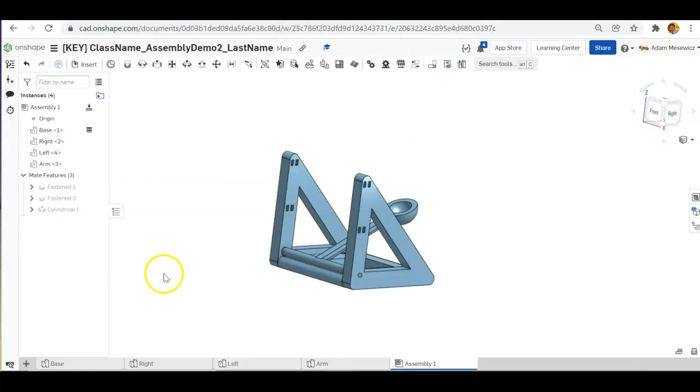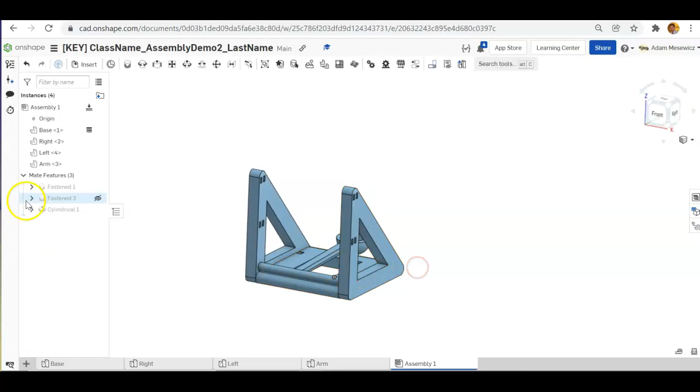In order to make this catapult, you can see that there are several different parts. We have our base, the right panel, the left panel, and the arm. All of these together, when we put them together using the Fasten and the Cylindrical Mate connectors, create this catapult that has realistic motion.

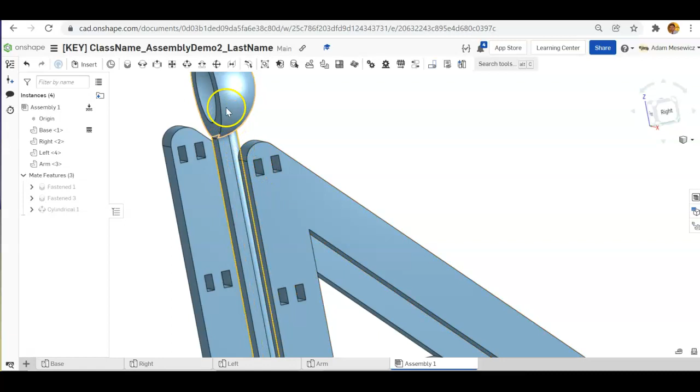Notice how when this is coming down, it's not running into this plastic here, it's not going through it, it's stopping right there. When it goes up, it's going to actually end up hitting - these are going to be where our rubber bands are. We can't model rubber bands in OnShape, but we can imagine that if we had rubber bands here, this is where they would stop. That is what we're creating.

Let's go ahead and get started with this. The first thing you need to do is make a copy of all the parts. Eventually you will be creating all these parts on your own when you do your own catapult, but for today we're just focusing on assemblies.

You'll click on the three bars at the top, and you'll copy that workspace. Make sure that you rename this correctly: your class name, underscore, assembly demo 2, underscore, your last name.

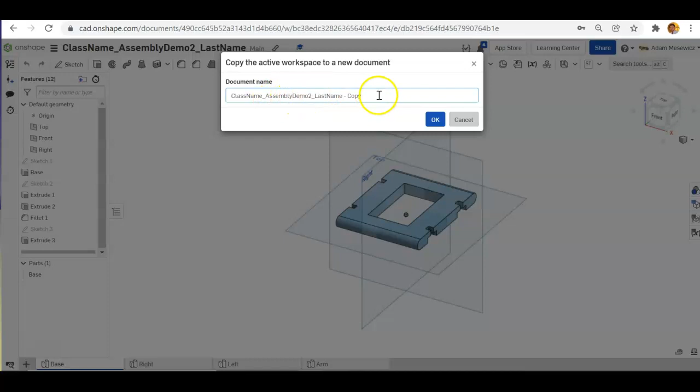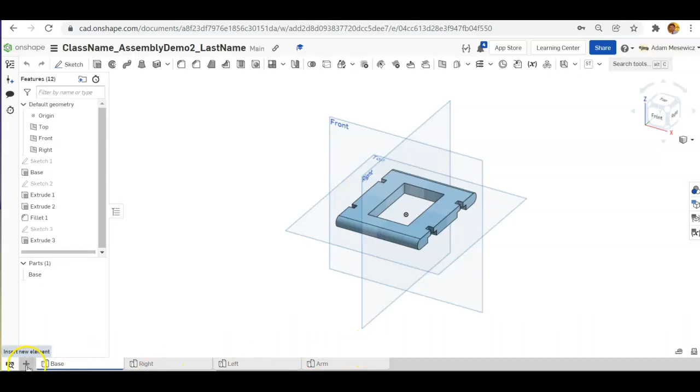Now that we've got our copy of our document with all of our different parts, the first thing we're going to do is create that assembly tab so we can put all these different parts together. To do that, we'll click on Insert Part, Create Assembly, and now we have this assembly tab. I'm just moving it to the end here to keep it a little more organized.

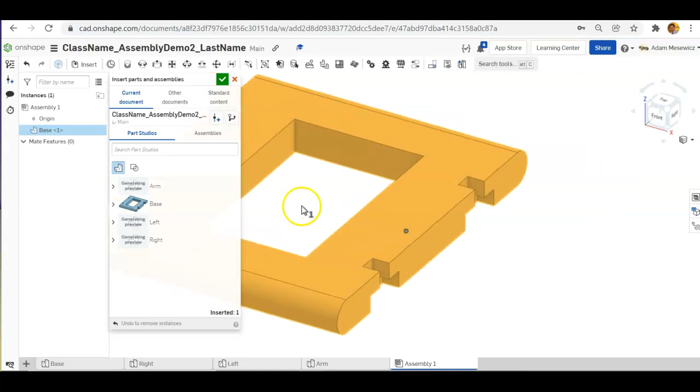The next thing we'll do is start bringing in our parts, and the first part we need to bring in is our base. We'll click on the base, and we can set that wherever we want. Setting it around the origin is probably a good idea - it'll just be easier to zoom to.

We'll confirm this for a second, because the next thing we need to do is fix this base in place.

Today you're going to learn about the Fasten Mate connector, which is different than fixing a part in place. When you fix a part in place, which you can do by right-clicking on the part in the menu and clicking Fix, this icon comes up and fixes the part so it does not move anywhere. You will not be able to move this, and anything you connect to this will be fixed in place as well, unless you allow it to have different degrees of freedom with the Revolute, the Slider, or what we're going to learn today, the Cylindrical Mate connector.

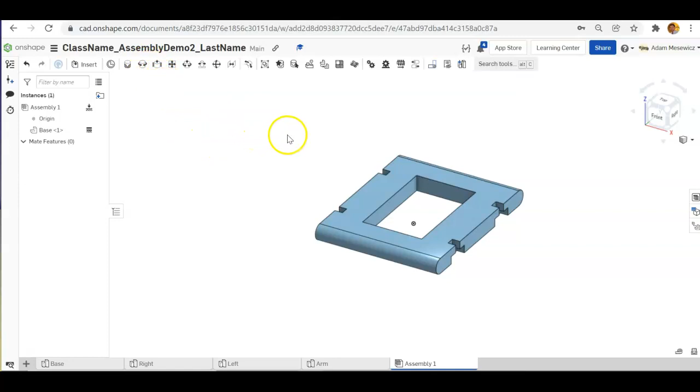So again, fixing is different than fastening. The one part that needs to be fixed, and the only part that needs to be fixed, is that original base. When you're coming up with any of your other projects, whatever part that everything's being built around - that is the part that needs to be fixed.

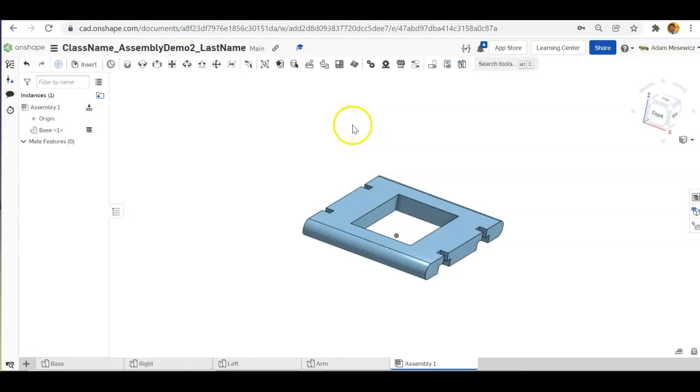Now that we've got the base fixed, we can go ahead and bring in our first part that we're going to attach to that, and that will be the left panel. So we'll bring this in here.

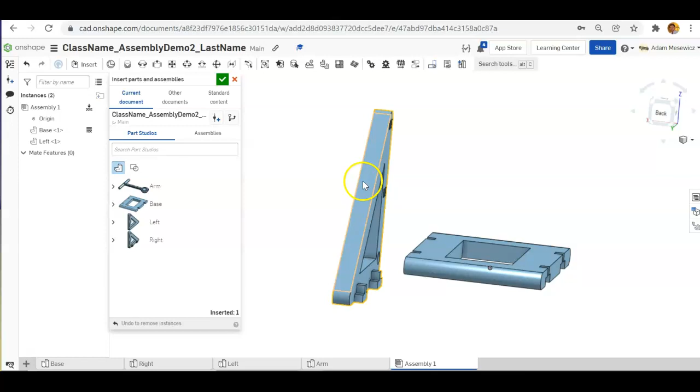You can see that we have these little tabs here that are going to go into the base. Because we want these tabs to go in, we don't want them to move around once we put these things in - it's not like we want these arms sliding in and out. The way that we made these dimensions, they should barely fit - they should be really snug together.

And if we wanted to, we could even put some super glue in there to make sure they don't move around. To show that in OnShape, that's where we're going to use the Fasten Mate connector. It's like super glue. When you click these two different surfaces together, they will be connected like super glue.

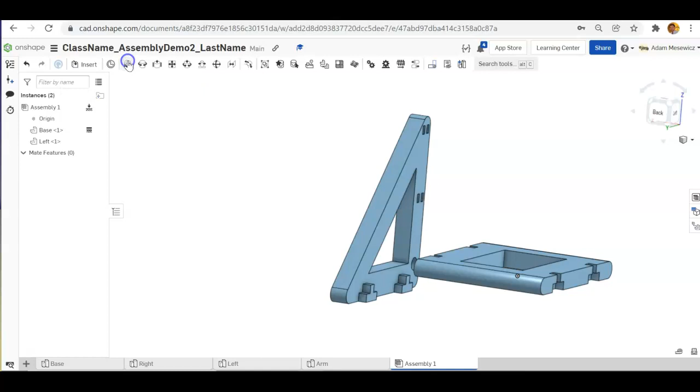So we'll choose the Fasten Mate connector, and then we can choose either of our two tabs, the surface on either of these. The only thing that matters is if we choose the back one, then we need to choose the back of the inside of the base. If we choose the front, we need to choose the front. So I'm just going to choose the back, it'll be a little easier for me.

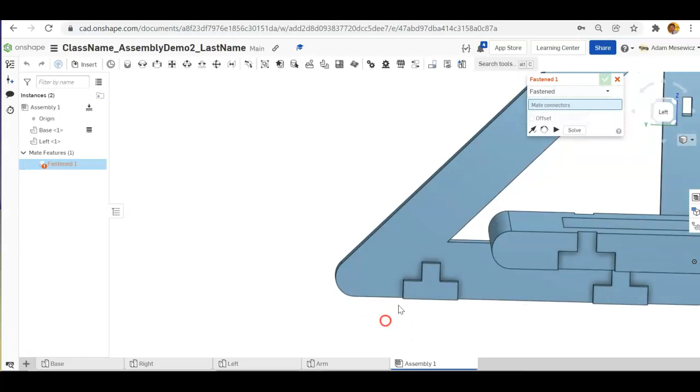First I'll make sure I'm on the surface of my tab there, then rotate around and zoom in to get to the surface of my base. I can zoom to check, and that looks great. So if we click here, this brings up another Fasten Mate connector.

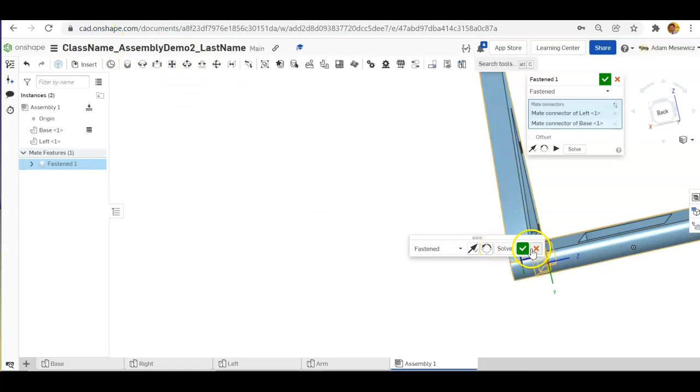Some people thought that was an error. It's just that if you're trying to move quickly putting an assembly together, doing all your fastens at once, you won't have to redo this every time - you can just click check here. But if you're finished for a while and want to check everything out, just click this green check up here, and that'll finish without giving you a new fasten.

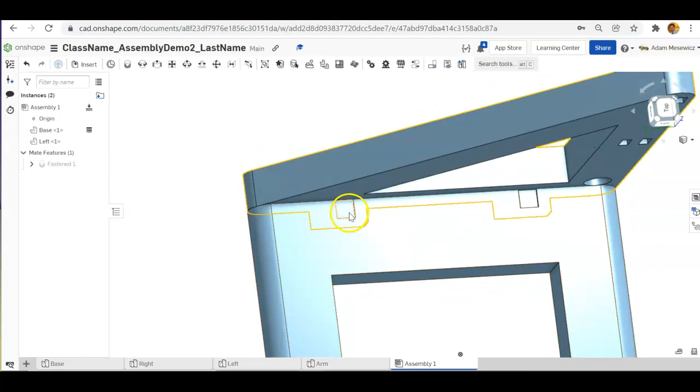The only reason I want to do that is to show you a little 3D view of what's going on here. We've just connected our parts together, and again, they are glued in place, so this cannot move around at all. If you try to click and drag, because this base is fixed and this is fastened to our fixed base, nothing's moving.

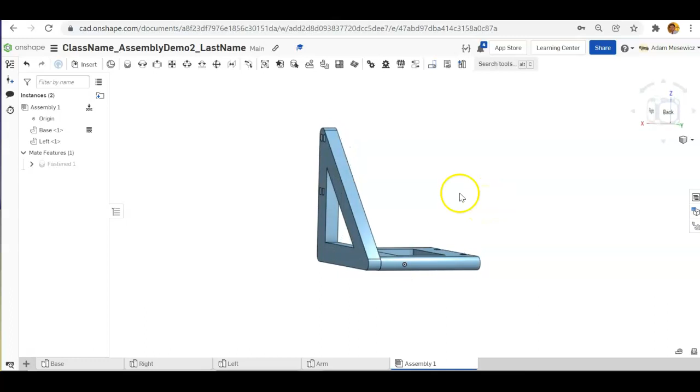Okay, so you can go ahead and bring in your right panel and fasten that to the base. You should be able to do that on your own, so I'll do this kind of quickly. If you need to pause, you can pause.

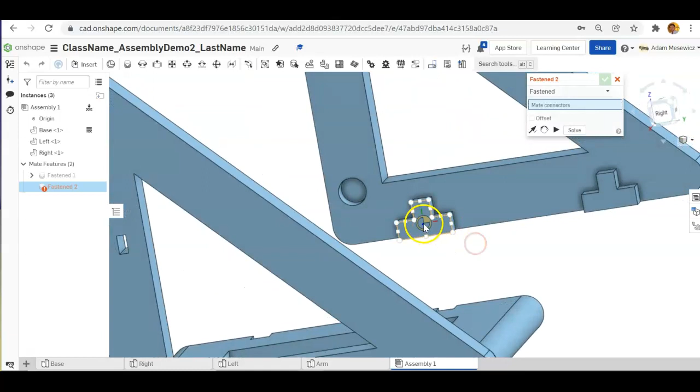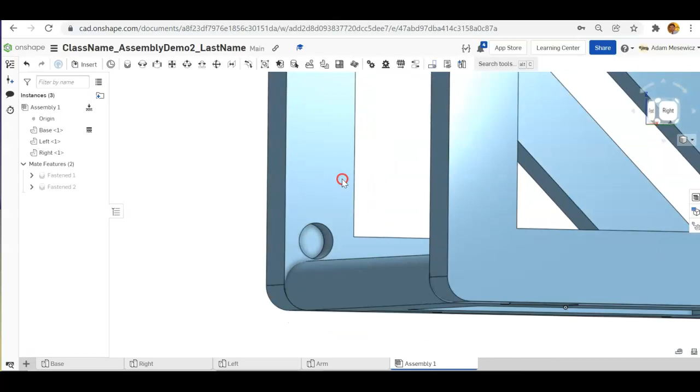Alright, so hopefully you didn't have any problems with that. If you did, again, just pause the video, test some things out, see what went wrong. But you should have your base all put together - this is all fastened together, so nothing is moving at this point.

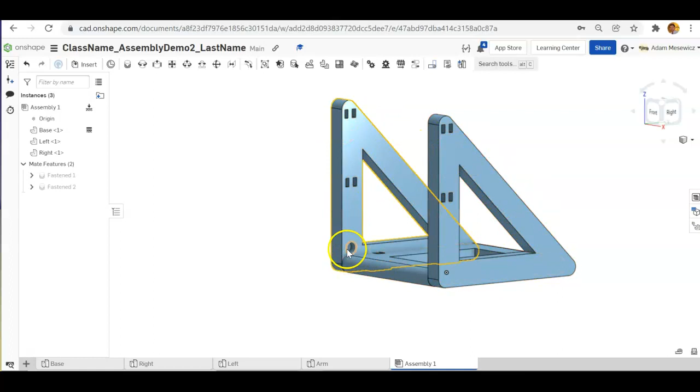Alright, now we're ready to bring in the arm, and the arm is not going to be connected with a Fasten Mate connector because we want this arm to have motion - able to rotate up and down. We also want the axle to be able to go a little bit freely in and out of these two different holes of our base. So we're going to use this Cylindrical Mate connector, which is actually just a combination of two mate connectors you learned about last week, the Revolute and the Slider Mate connector. If you combine these together, that's the Cylindrical Mate connector.

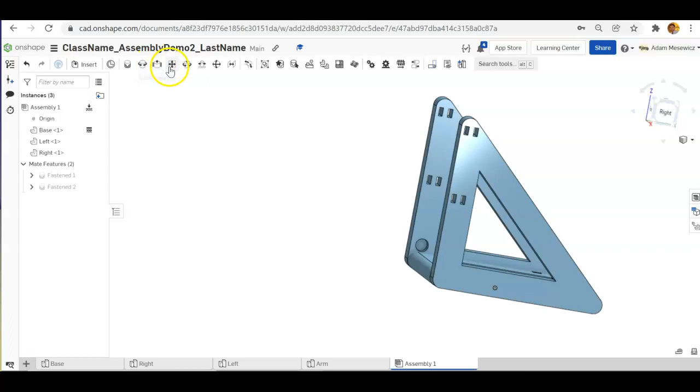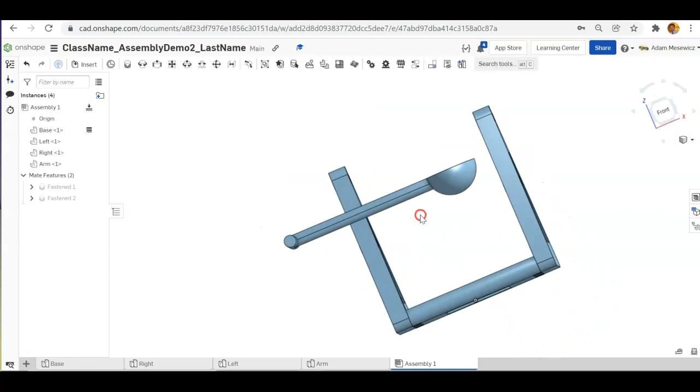So let's go ahead and bring in the arm. The only thing we need to realize and check is that this needs to be facing up - we can't shoot any projectile out of the back side of this. So if we have the right side of this arm, we need to make sure it's connected to the right side of our base. That's really the one important thing here. Other than that, you just have to pay attention to some details.

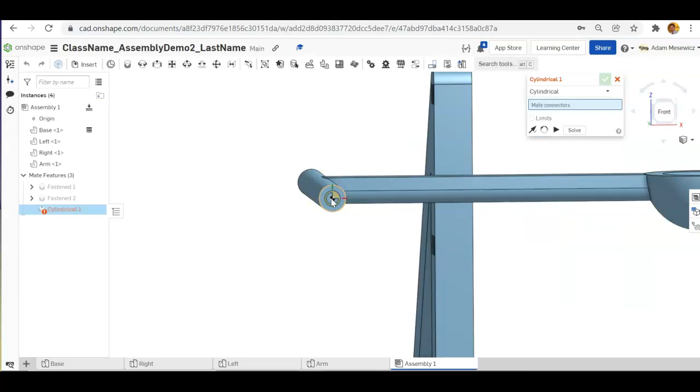So let's go ahead and choose that Cylindrical Mate connector, then select the first mate of the arm - again that's the right side, so we're connecting it to the right side of our base. Depending on where we choose here, this will affect our limits. I'm going to choose, just to make it easy, the most inside of our three planes.

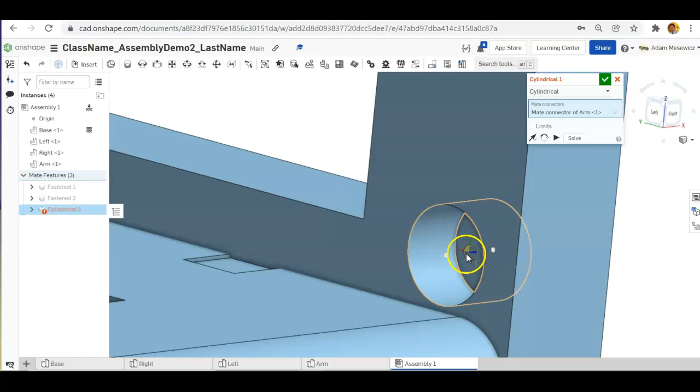If you didn't get to this point in the last demo, you should have realized you can choose multiple different planes - you can always choose the back surface, the middle surface, or the top whenever you're adding a mate connector. We're going to choose the top for this one, so that will be our 0 position.

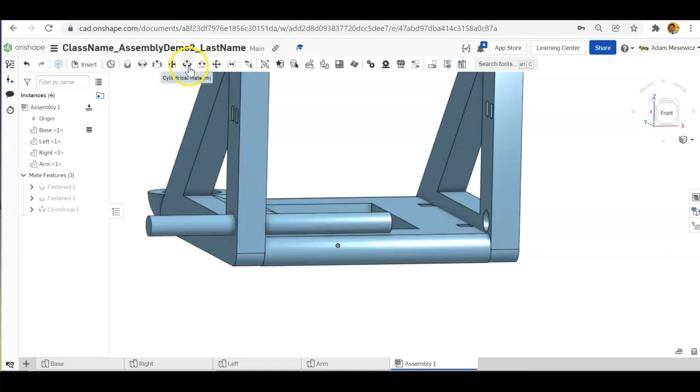Now, just because we chose that as our starting position doesn't mean that we're not going to be able to move this along. Remember, the Cylindrical Mate connector allows for that side-to-side and rotational movement. So we're going to have to set limits to make sure that it's not actually going through our plastic. But right now we do have a good start for what we're trying to get.

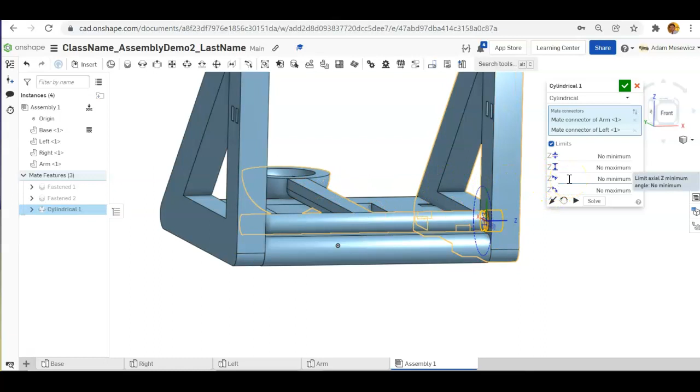So let's go ahead and go into our Cylindrical Mate connector and set some limits. You can see we have 4 different limits we can set: a minimum side-to-side distance, a maximum side-to-side, a minimum angle, and a maximum angle. So we'll start with the side-to-side minimum, and that minimum will be the furthest point we want it to move on the inside.

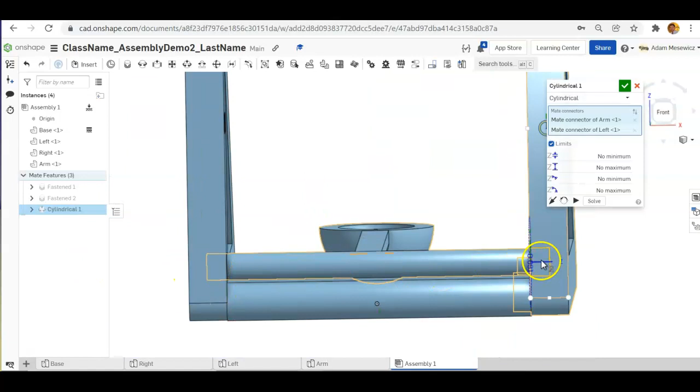So if we see right here, this very edge is at 0, that would be the lowest we would want it to go. We don't want it to go any further this way, because if it does, on the other side it's going to start going into the plastic. So 0 is going to have to be our minimum here. Now, if you chose one of the different planes, like the middle or the far side, you would have to adjust your minimum to make sure that it is correct. But for me, where I chose the top surface, 0 is going to be my minimum.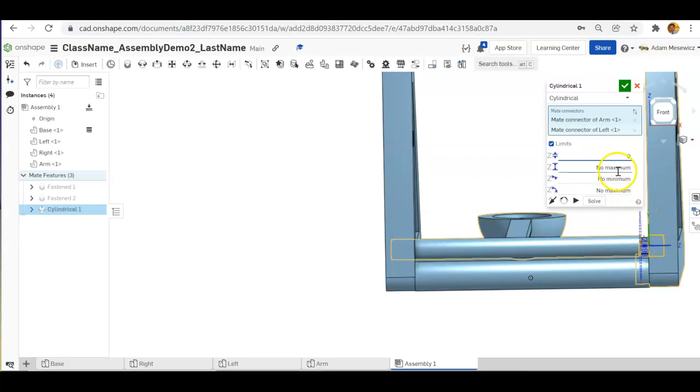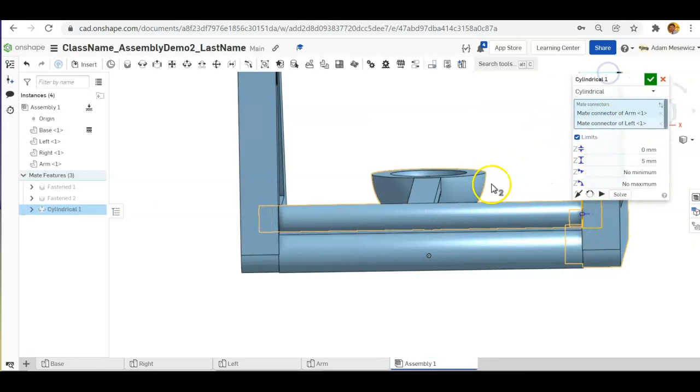And the furthest that I want it to go in would be 5 millimeters. So my maximum would be 5. If we just press play really quick to see where we're going, you can see side to side it's going from 0, which is the furthest we want it to go in, to 5, which is the furthest we want it to go the other direction. So we've got our side to side limits perfect, 0 and 5. Again, that's because I chose this as my mate connector on the left. If you chose something different, then you might have to adjust that.

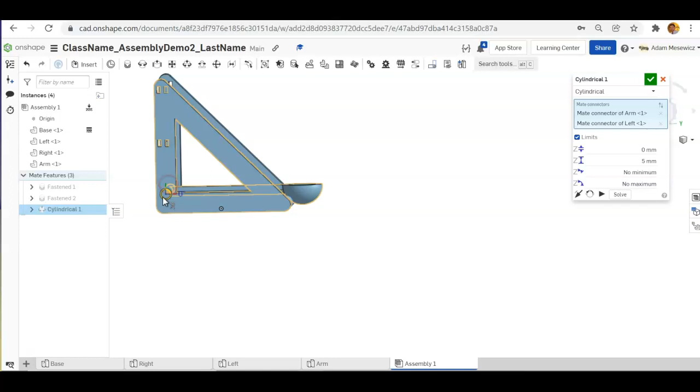But the last thing we'll have to do is set our angle. Right now we have our angle for our secondary axis nice and perfect, at 0 degrees. Now this is not actually going to be our minimum because you can see that this is going into the plastic and that's not real. So we'll have to move this up until it's not touching the plastic, which is in reality at like 2.283 degrees. Now, if you do not have that, and this is what I saw in the last demo, some people were having different secondary axis rotations.

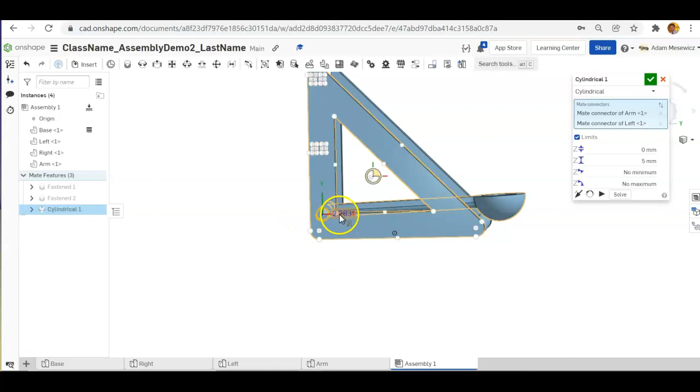There's this button here that says reorient your secondary axis. Basically, we can have this y-axis be straight up and down, we could have it sideways, down, or facing this direction. So if for some reason your orientation doesn't have it the same as mine, where your 0 degrees is here and your 90 degrees would be vertical, then you can just rotate this and make sure that is the case. So 0 degrees should be flat here. If it's not, then reorient your secondary axis.

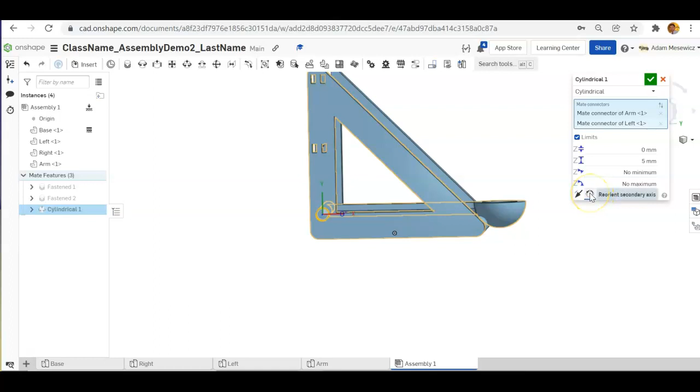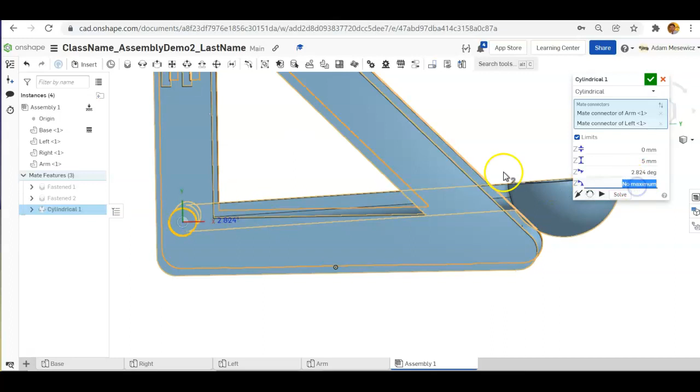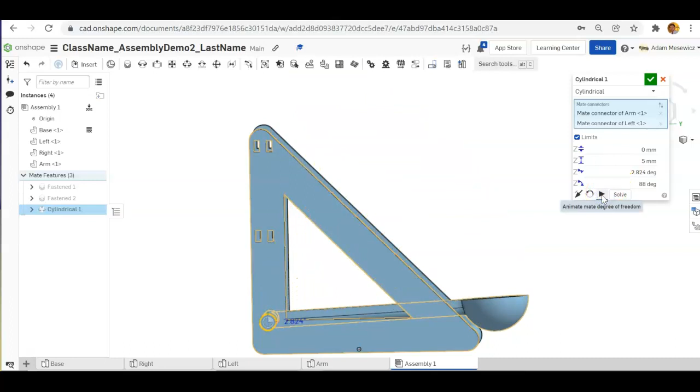But the minimum is not going to be 0 because we don't want it to be going into our plastic. The minimum is actually going to be, let's see how close we can get. About right there, 2.824. So our minimum angle is 2.824. And then the maximum angle is going to be all the way up to where we're contacting the rubber band bouncers, which would actually not quite be at 90 degrees, maybe about 88. So I'll set my maximum angle at 88. And then if we play that, we should see it stops there and doesn't go into our base.

So now that we have our cylindrical mate connector and our fasten mate connectors, we should have this realistic motion. If you test it out yourself, you should see we got the side to side, which is exactly what we want. We want this to be able to rotate freely. And because it can go side to side, we also know that it can rotate down and up. And we know that we'll have rubber bands going across here, so that would stop this from being able to go any further.